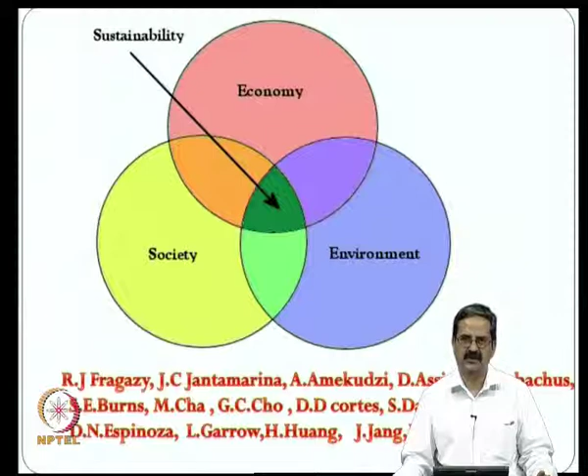What it means is that sustainability is something we need to define in this context: we need to use natural materials available today without affecting the needs of future generations, in a way that does not affect the environment, does not affect the economy, and creates general well-being. In this context, the role of geotechnical engineering is very significant.

I must say that apart from environment, it is also more about energy reuse and energy use as well. I would like to present some ideas on this today, and also understand or establish research priorities and offer suggestions to practicing engineers to get more involvement in the area of sustainability.

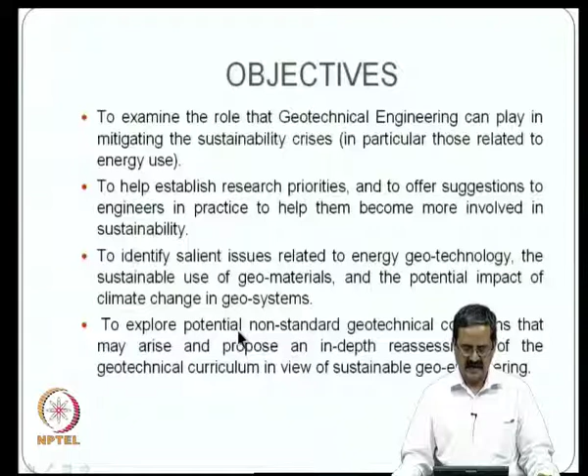We will also talk about salient issues related to energy geotechnology, the sustainable use of geomaterials, and the potential impact of climate change in geosystems. We would like to explore certain non-standard geotechnical conditions that may arise, and propose an in-depth reassessment of the geotechnical curriculum in view of sustainable geoengineering.

What we studied so far in ground improvement is that, for example, for a civil engineering structure, earlier people went for pile foundations. Of course, even now that is the order of the day, but they can be improved with, for example, stone columns. A simple example: the carbon consumption in the case of cement and steel is much higher, whereas you are trying to use some sort of stone or other aggregate materials.

In the case of soft soil, when you want to increase the bearing capacity of soil, one solution is to use columnar structures where the soft soil has, say, 10 kPa of shear strength, and you would like to improve the bearing capacity and reduce the settlements. Instead of going for pile foundations, stone columns is one viable option, or geosynthetics is another, or geocell foundations. There can be varieties of solutions, but you need to understand the impact in terms of sustainability that you are contributing.

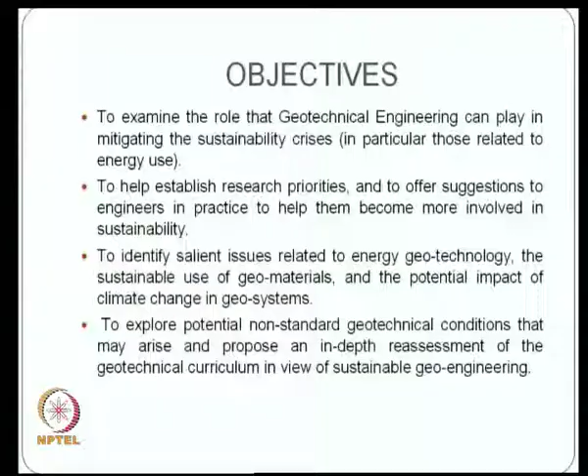We will discuss some of these things in this class today. As I just mentioned, sustainable development means you are trying to meet the needs of the present without compromising the ability of future generations to meet their needs.

The development of a sustainable world will need a very deep understanding of the global processes that are complex. There are many of them: physical, biological and human systems. Nowadays, the current scenario is that many of these factors are interrelated and they negatively impact the quality of life.

Whether in the developed world or developing world, things are happening because efforts are being made in the developed world and also in the developing world. In the developed world there is already a lot of consumption of carbon, and they are trying to understand how to go on from now on. And particularly in the developing countries, there are a lot of construction activities coming up. Is it possible to really look at what sustainability is in this context?

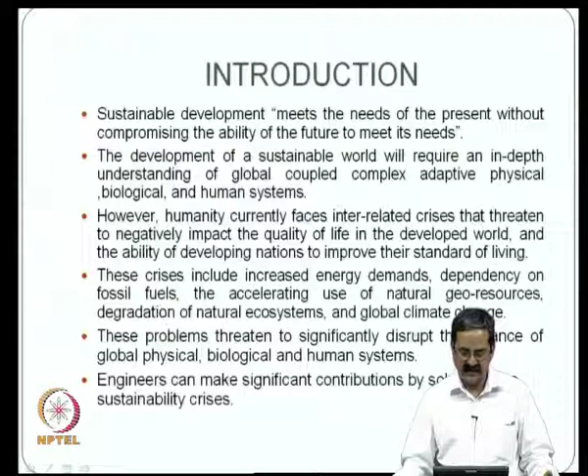So why these things have become necessary is that you have increased energy demands; energy requirements are too high nowadays, and they depend on fossil fuels. So there is an accelerated use of natural georesources, degradation of natural ecosystems and global climate change. These problems threaten to significantly disrupt the balance of the global physical, biological and human systems.

For example, there is a rise in temperature. People are aware that 20 years back it was not that bad, but now you see that there is a temperature rise, and you see that a lot of hills are being destroyed to construct roads in many areas, and definitely the ecosystem that you have in the form of hills cannot be destroyed just for certain construction in civil engineering. You need to balance our requirements and also see that they do not affect the way we live.

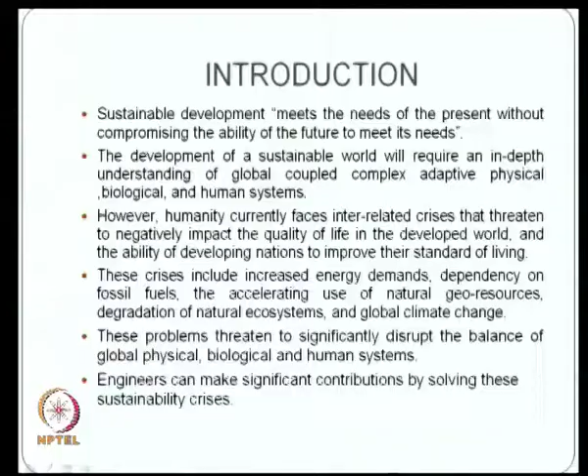So all engineers need to understand and make significant contributions by solving the sustainability crisis. It's very important. And regarding the energy crisis, you may ask how geotechnical engineering is related to energy. You will see in a minute that it has a significant role, particularly in terms of geothermal energy and other issues.

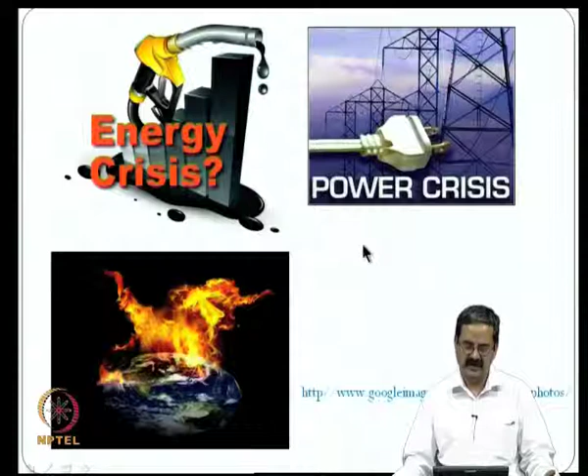What are the immediate threats to sustainability? One is the use of natural resources at a rate that will limit the ability of future generations to obtain and utilize resources such as fuels, water and air. So the rate of use of natural resources should not be so fast that it will affect the balance or the needs of future generations.

That's one thing, like material requirements. As I just mentioned, the codes normally specify good quality aggregates, but then you don't have good quality aggregates. In this context, why don't we use recycled aggregates or some materials that are stiffer and still serve the purpose of virgin aggregates? Then fuels: now we are living on a lot of petrol and other products, but is it possible to have some alternate source of fuel for heat generation? Of course, water and air are also premier important; we need all of that, and we should see that these things are not affected.

So the degradation of natural systems to a point that may jeopardize the beneficial balancing functions is something to consider. What we know is that the natural system should not be degraded, and we have to have a balanced view of what we need and what we can use. That's one thing.

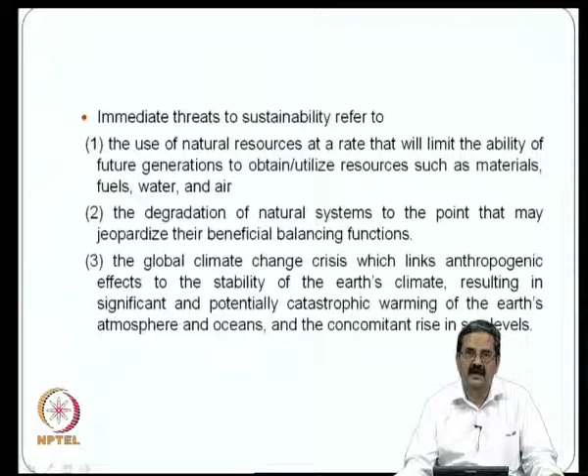And the global climate change crisis: nowadays we are all hearing that there is a temperature rise, there is an increase of carbon in the atmosphere which leads to increase in temperatures. These have links to anthropogenic effects, or man-made activities. They have a big role in the stability of the Earth's climate, resulting in significant and potentially catastrophic warming of the Earth's atmosphere and oceans and a concomitant rise in sea levels. This is a very significant point, and how geotechnical engineering can address this is something that we need to see. I'll give an example.

It's estimated that in 2007 the world consumed approximately 504 exajoules of energy. 1 exajoule is 10^18 joules, and this is equal to 12 gigatons of oil equivalent. So in 2007, 12 gigatons of oil equivalent were used, 81% of which was derived from fossil fuels. This is very alarming; this sort of reliance on fossil fuels, trying to get all the energy from fossil fuels, is not very sustainable.

This is a very serious issue, and though we may have large reserves of coal, oil, shales and possibly methane hydrates, fossil fuels are ultimately exhaustible. Everything is finite, and the possibility is that you are going to exhaust them sooner or later. For example, the world's resource of coal, about 1600 gigatons, would provide 2.5 kilowatts per person for the next 100 years, and what happens after 100 years is something you need to understand. Similarly, oil and natural gas are limited. So we need to understand that if we rely on fossil fuels as the source of our quality of life, they definitely lead to a lot of issues.

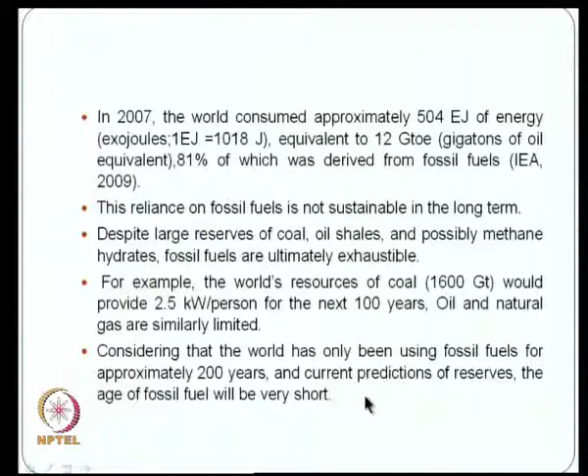This is a big change, because though this is a mean average, it means a lot for the ecosystems. For example, the melting of the snows and changes in ocean levels. There are many issues connected with this, and the climate change that we have been seeing today is a result of this.

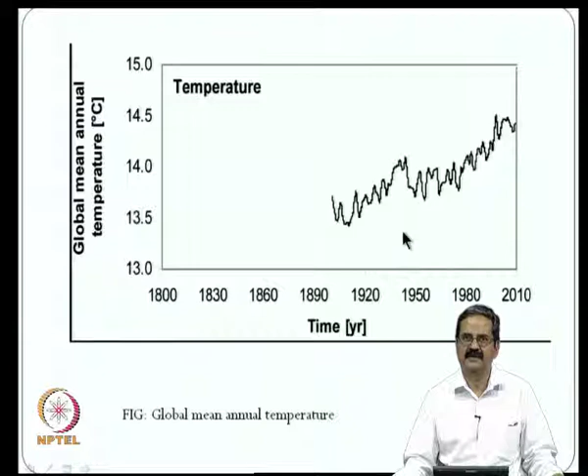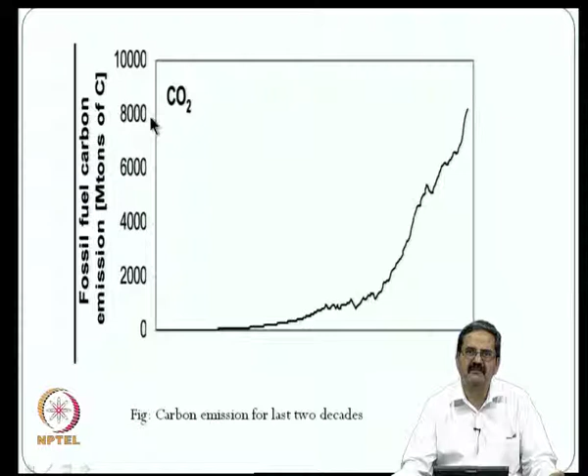And look at the carbon emissions, which are supposed to increase the temperature in the atmosphere. You can see that in recent times, in the last decades, the fossil fuel carbon emission in million tons of carbon is very high; it is about 8,000, and it is just increasing too much. So, your objective is to save this energy and also to contribute to some extent.

The relationship between fossil fuel use and global warming has been understood through increased CO2. We know that increased CO2 levels will increase the temperature, and this has been understood very well by climate modelers. The current concentration of CO2 in the atmosphere is about 380 ppm, parts per million, and research suggests that a concentration of 550 parts per million could trigger severe climate change.

This is from the IPCC 2000 report: if you have a further increase in the carbon concentration, the climate changes are going to be much more drastic. So, the objective now would be how to stick to this, and people estimate that 550 ppm will be reached by the year 2050, and unless decisive action is taken by all the communities, it is not easy to control this concentration of carbon.

Efforts to control global temperature changes to a level considered acceptable will require curbing CO2 emissions so that the concentration in the atmosphere remains below 380 to 450 ppm. There is now a specification of what is okay, and people need to work back to what a particular nation, a community, or the international community should do together so that this limit of 380 to 400 or whatever is adhered to, and we should never reach the limit of 550, because that leads to a lot of climate change.

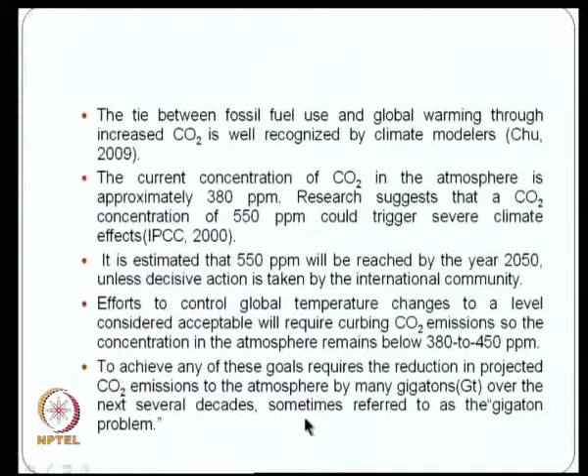So, achieving these goals requires a reduction in projected CO2 emissions to the atmosphere by many gigatons over the next several decades, and people always say that this is a gigaton problem. Most of the strategies proposed to date, such as improved gas mileage for vehicles or improved power plant efficiency, do not explicitly involve engineering, geotechnical engineering.

You must have seen that we have fuel efficient cars, but it does not mean much. For example, instead of 10 kilometers, you may have an engine which gives some 15 kilometers, but there is still consumption of gas, which is very problematic. So all disciplines, all branches of science and engineering, need to look at how to reduce this carbon print on the atmosphere, and actually geotechnical engineering is one big way.

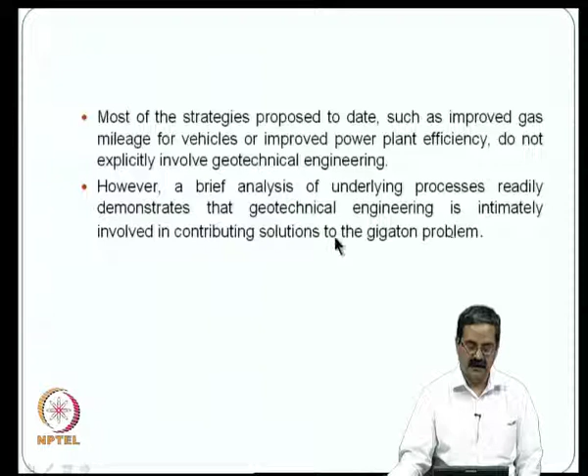If you have a proper understanding of geotechnical engineering principles and ground improvement principles, they have a very, very important role in carbon print reduction. So, I will just introduce some principles here, a brief analysis of processes in which geotechnical engineering can help reduce this issue.

This is another figure which shows that you have from 1955 to 2105 the time scale, and you have carbon emissions in gigatons per year. So, up to 2005, this is whatever has happened. But then if you continue at this rate, what happens? Definitely you are going to be on a high scale. So, the rate has been at 14 gigatons of carbon per year.

If it just goes, it is going to be significant, but then you would like to reduce them in some way. So, you have to reduce to some levels. For example, if you are aiming at a very good reduction of 70%, and there is some way, like you have different wedges drawn here, you need to identify what should be done from here. This is called stabilization wedges.

You do not want to really follow this level, but we would like to reduce by some levels, like come back, you reduce the slope of this line to this level. These are reduction wedges; you try to come out with some strategy of stabilizing or reducing. This is the point here. So, you need to come out with various methods and plans, so that the ultimate carbon emissions will not endanger the atmosphere.

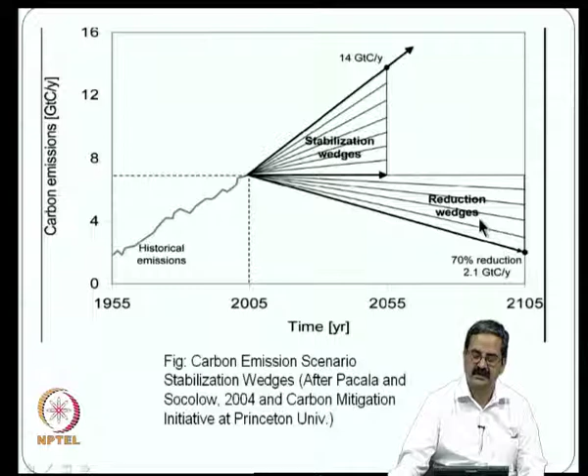People have been working on this particular point nowadays. I was in one conference in the US about 3 months back on geotechnical engineering and how geotechnical can help, apart from ground improvement, energy. It has become a topic called energy geotechnics, where you have multiple ways of handling the ground engineering problems. Nowadays, ground engineering is not just limited to ground improvement.

The concept is that you have an all-encompassing attitude that helps the globe, reduces global warming and also provides energy and energy recovery, waste recycling. Suppose there is a waste material that can be used in a road project, definitely it leads to a reduction of carbon emissions. So, people have been talking about this, and in this context, the coining of the term energy geotechnology as a part of ground improvement is something that needs to be accepted.

The main sources of energy are petroleum, about 34%, coal 26.5%, natural gas about 21%, combustible renewables and waste about 9.8%, nuclear power 5.9%, hydroelectric 2.2%, and the others mainly wind and solar. Of course, the efforts have been less in this, as per the 2007 data, and of course, it varies; different countries have different numbers in this area.

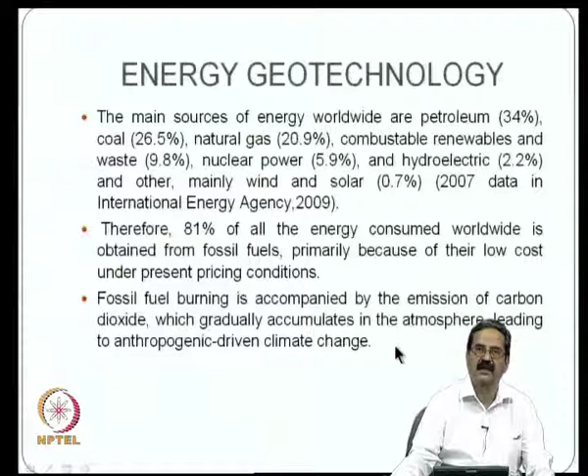This is what I would like to say. The current global energy consumption rate is about 15 terawatts, and there will be a pronounced increase in energy demand in the next 25 years because everybody is looking for economic development, and there is also population growth. If you look at these two factors, you can say there's a 17% increase if consumption and population growth continue at current rates, the business as usual option. So the 17% increase is in terms of the energy requirement. It is huge, a 17% increase is huge.

The second thing is a 66% increase if consumption in the underdeveloped countries increases to levels required to attain a proper quality of life. We know the quality of life in some countries is not good, and the way quality of life is defined needs to be examined in the context of what consequences it has. A 66% increase is big, and suppose an underdeveloped country does not have fuels and relies on fossil fuels, burning their existing options, then it leads to very significant effects, a big bearing on energy demands as well as climate change.

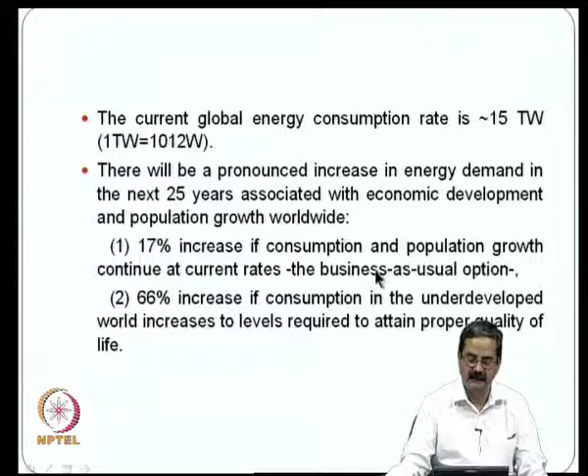So what people have been trying to do is look at geothermal energy as a source of energy. For example, deep geothermal energy systems extract heat from hot rock formations. You have hot rock formations underground where the temperature is about 350 degrees, to produce steam that can be used directly to provide heating or to generate electricity. Many countries have been doing experiments in this direction.

Conventional geothermal technology focuses on energy production from rare near-surface hot spots that are sources of steam or hot water. For example, in the Himalayas and other places, people are aware of hot springs that exist, and people are looking into whether this information can be used to obtain geothermal energy. If you have a hot spot in the Himalayas with no electricity, that could be a good option to irrigate or provide electricity to nearby villages without too much effect on other lives or issues. The vast majority of the world's accessible geothermal energy is found in hot dry rock, and the reservoir must be engineered for energy production.

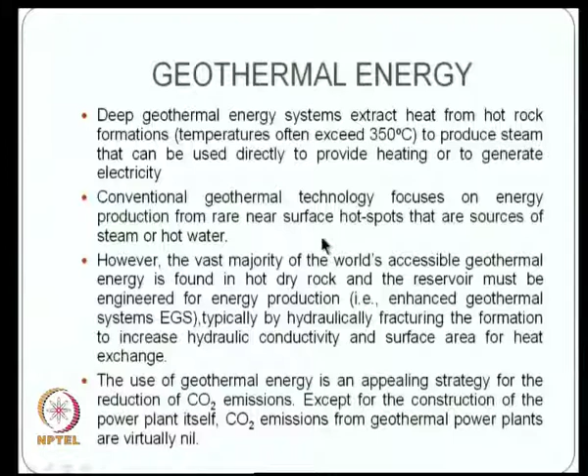This is a typical figure. At deep temperatures, you have injection wells, then production wells where you can recover that energy. You have deep geothermal recovery for electricity generation, and there are also ways of distributed geothermal storage and recovery systems at shallow depth for residential purposes.

There are certain issues where for houses, particularly in places like the Himalayas or even in the UK, where the climate is very cold in winter, people use room heating, which is a big source of energy consumption. People have been looking at options to obtain geothermal energy from the ground and use it for room heating. This is for houses and apartments.

In fact, people have what is called energy piles. I am aware of the work being done in the UK, particularly at the University of Cardiff, where they think energy piles could be one option to reduce the load because of room heating requirements.

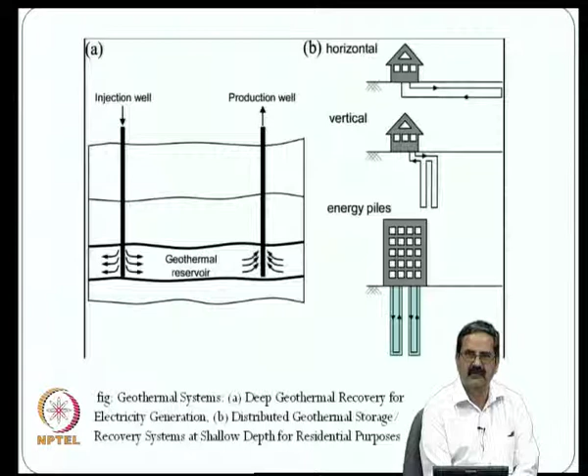So these are some examples. Very importantly, whatever you do, you are looking at sustainable geothermal systems, meaning they should be useful as a source of renewable energy, number one, and it cannot be an energy that gets exhausted. So you must have a time scale for these systems, for example, how can you make geothermal systems very effective over 10 years?

One serious issue I always feel, apart from geothermal energy and solar systems, is that world energy systems have certain impacts. In India it's common practice that in many villages you don't have power in summer, and in summer you have sun burning at 45 degrees temperature. If you have some sort of heat recovery systems, energy recovery systems, and proper piling and foundation systems where energy can be stored at the top and bottom, there could be a system where, based on certain calculations, over some years you establish that you do not need energy from conventional sources, and the energy from geothermal or solar systems is sufficient. That would be a big contribution.

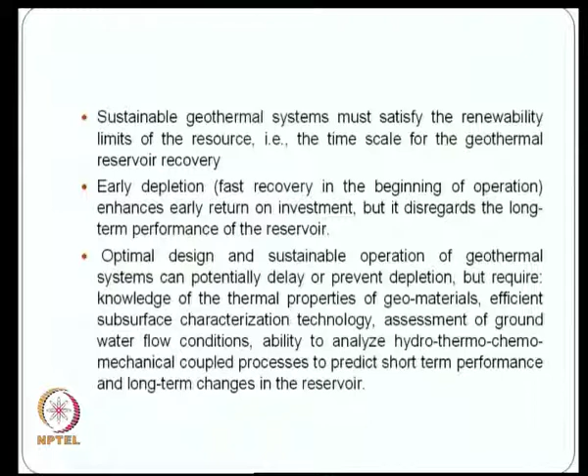One should be careful, because fast recovery in the beginning of the operation enhances early return on investment, but disregards the long term performance of the reservoir. So you should strike a balance between the depletion and, for example, you would like to store all the energy in terms of watts to a particular area, but you should be able to judiciously combine the needs as well as the capacity.

These are all very, very intricate issues. The capacity that one can have in a particular system, and also the demand that you can place on the system, is something that one needs to assess properly. People have not completely understood some of these systems. And these are all the areas that are governing the future.

So one should look at, and all geotechnical engineers or ground improvement engineers should look at devices. Say if somebody is going for piles as a source of energy, like thermal piles. One needs to understand, instead of the use of stone columns to improve bearing capacity, the use of a steel pile or some sort of thermal pile to recover heat and bring it to the ground, is something very innovative. So one needs to understand a lot of dynamics.

For example, people need knowledge of the thermal properties of geomaterials, like hydraulic and heat conductivity of the materials, efficient characterization of the subsurface materials, and assessment of groundwater flow conditions, since water has a significant role in temperature reduction and increase. More than that, the ability to analyze the hydro, thermo, chemical and mechanical processes—you have a number of processes here: water related effects, thermal effects, and also chemical effects and mechanical effects.

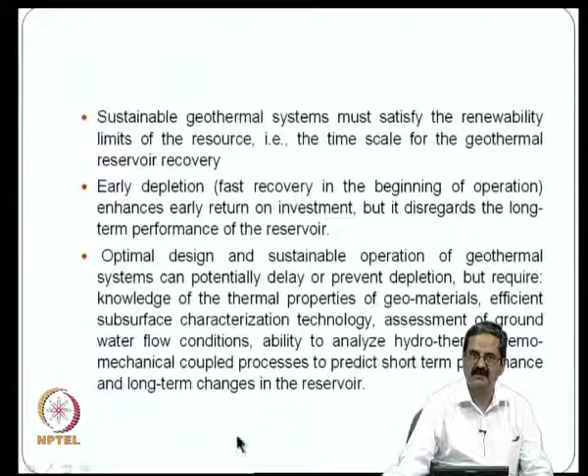So development of enhanced geothermal systems also requires advances in drilling technology. The conventional technologies are not adequate. You may have to go for high temperature rock drilling for deep systems, controlled hydraulic fracturing in hot rock, and analysis of induced seismicity.

In fact, you need to do hydraulic fracturing, breaking of the rocks in a controlled manner, and you must see that the more you introduce fractures, the more it leads to some sort of seismicity—like plate tectonics should not be affected. We had the classical case of reservoir induced seismicity, which should not happen here. So one needs to understand that there should be a controlled way of doing this particular thing.

So without advances in these areas, geothermal power production will be significantly limited. You may have a lot of knowledge and ideas, but if you do not exploit it in a proper way, it may lead to much more serious difficulties than what you initially thought of, and one needs a lot of careful analysis.

The other concept I mentioned was shallow geothermal heat pumps used in homes and commercial buildings. They utilize the thermal capacitance of the ground to transfer heat from the structure to the ground in the summer, and from the ground to the structure in the winter.

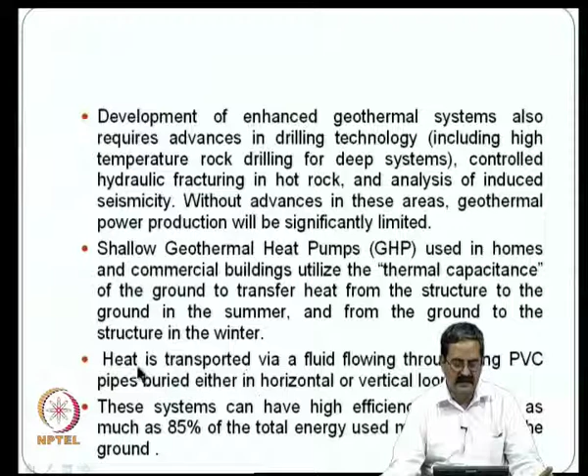And even in foundations, the way that we design them. In most cases, the heat is transported via a fluid flowing through long PVC pipes buried either in horizontal or vertical loops.

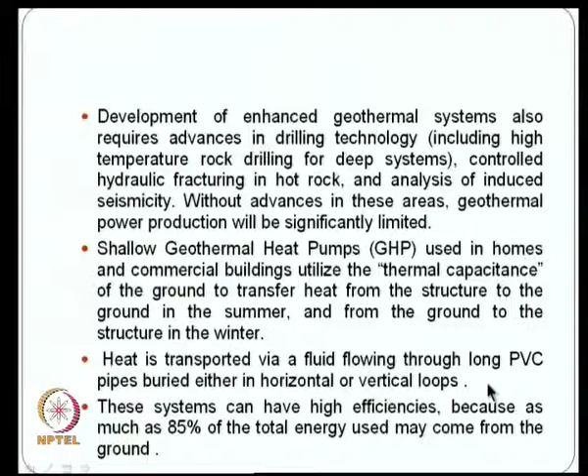These systems have very high efficiencies, because as much as 85% of the total energy used may come from the ground. Some people have made calculations on this, and they say these are highly energy efficient systems, and people have been using it.

Geothermal heat pumps often require more than 100-meter deep boreholes, or trenching 1 to 5 meters deep for single family home systems, or can incorporate the loops within the deep foundations for high-rise buildings, as energy piles. This concept of energy piles is what has been followed in the UK and other places.

This was in fact highlighted in one of the earlier lectures, when I discussed the scope for ground improvement. You can see that it needs very deep boreholes, also trenching at a deep level, which is not easy.

The cost of the boreholes needs to be understood—it's quite expensive as well. And then even having loops within the deep foundations, particularly if you are trying to go for pile foundations, you need a system of piles—the energy piles.

The use of these systems for residential heating, ventilation and air conditioning is growing rapidly in Europe, and energy piles are becoming more common in commercial structures. People have to maintain an apartment, and if the energy requirements are going to be too high, it's not easy.

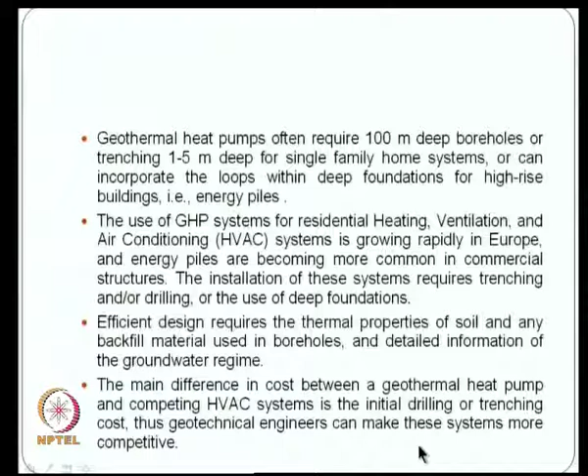Energy piles have the additional constraint of being utilized for support. This is where the concept of geotechnical engineering comes into picture—cyclic heating and cooling affects the skin resistance of the piles. Steel pipes are being used, and when you have cooling and heating of the piles, that will affect the skin resistance and may cause some settlements.

The long term efficiency of the GHP pipes or systems, including energy piles, is significantly influenced by the balance between the cooling and heating loads.

What are the cooling and heating loads? The piles or foundations, now acting as energy recovery or energy storage systems, are subjected to cycles of cooling and heating. We need to understand how the efficiency of these materials is influenced by cooling and heating, and understand the loads one can expect, as well as how ground temperatures play a role in this.

In addition to reducing the efficiency, sometimes what happens is that if the loads are not balanced, the ground temperatures gradually increase. What is required in this case is that we need to understand the loads, like cooling and heating.

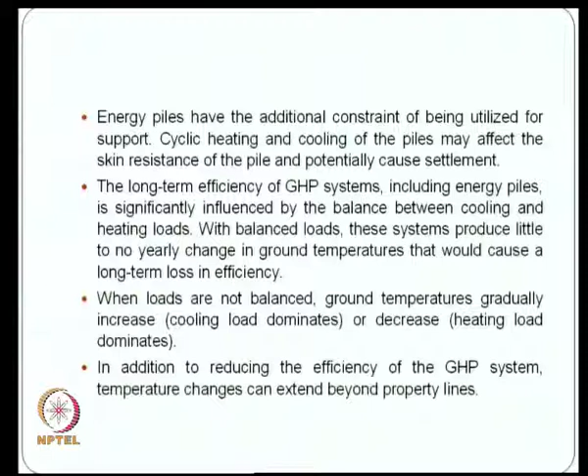What it means is that in a particular winter and summer, in the case of winter you need heat, so there is a lot of load, but in the summer you're trying to recover that capacity. So you have to see the balance in such a way that your design of the system should not lead to inefficient design.

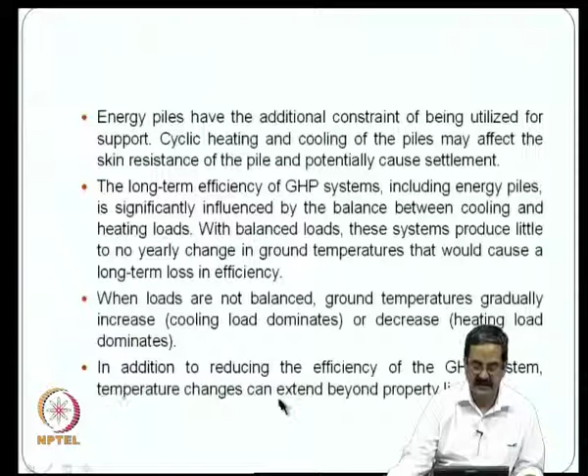When the loads are not balanced, the ground temperatures gradually increase and decrease and dominate, in addition to reducing the efficiency of the heat pump system. The temperature changes can extend beyond property lines. One should be careful about it.

The reason I am mentioning this is that people have been working on these lines, and of course we in India at least are not aware of the impact that it has. Definitely, use of these systems in highly congested areas like in Europe, where the urban localities are more populated, has significant issues, because the ground temperature changes from one system could affect the neighboring systems.

Similar to when you try to excavate a building here and remove some soil, it definitely affects the stability of the next building. So whatever changes you make here in the energy systems should not affect the next one, and this is very serious.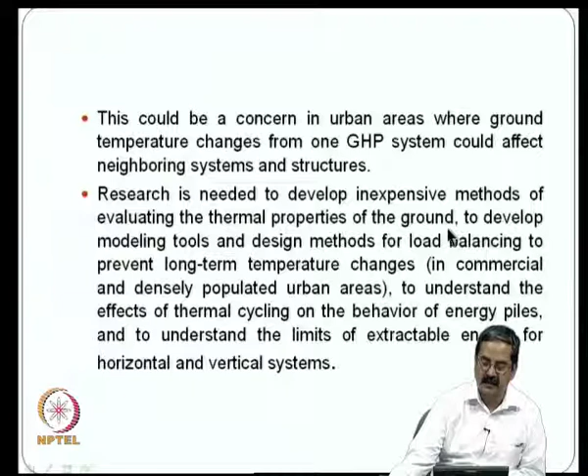So there is a lot of balancing that needs to be done, and research is required to develop inexpensive methods of evaluating the thermal properties of the ground. In fact, we do not have very good in situ methods. We should go for in situ methods of heat conductivity of the soil, and also develop modeling tools and design methods for load balancing to prevent

long-term temperature changes. You need to even use signal based processing techniques to see that if there is so much temperature rise, there should be an automatic switch off and switch on system, where your objective is essentially to get a balance.

You can only take what you need, so that sort of balance should come, or store what you can store. Excess heat also leads to problems, and deficiency also leads to some problems. So these variations need to be catered for in the design of the heat recovery systems.

The other thing I mentioned, the effects of thermal cycling, is something that needs to be understood, and all these things have to be examined in a careful manner.

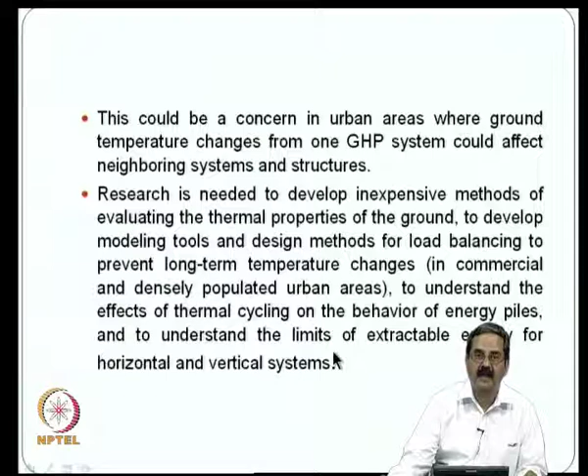Uses of underground space for energy storage is something that people have understood very well in recent times, particularly in the area of rock mechanics and geological engineering, where people have been doing a lot of work. Maybe in the broad spectrum of geotechnology it is not attempted, but if you have a bigger, global picture, people are looking at geoengineering or ground engineering in a way that energy can be stored.

One important reason is that solar, tidal and wind energy are inherently intermittent, and they have a lot of fluctuations in electricity production. So what people are trying to have is a lot of energy storage systems in the ground to efficiently use the generated renewable power.

So you have a lot of energy recovery systems, and you need to really store them properly. Geomechanical systems such as pumped storage, hydroelectricity and compressed air offer the means of storing large amounts of off-peak energy to supply peak demand. What people have been trying to say is that you store all the energy - hydroelectricity is one way, like we always have been doing, and compressed air.

In fact, you have to store this compressed air as a means of energy - compressed air has a lot of air pressure, the pressure energy. So that can be used as a storehouse, so that all the energy that you have can be stored to supply when there is a peak demand.

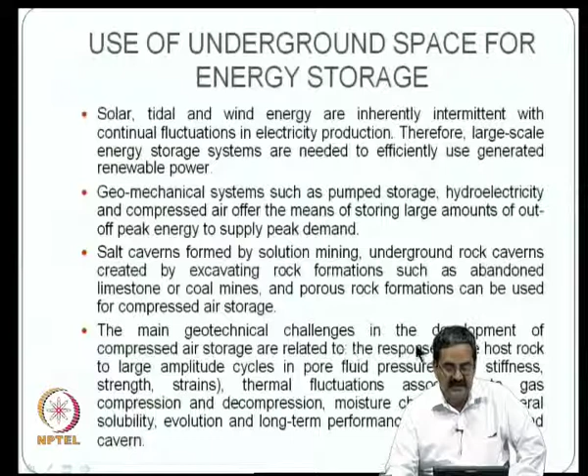So, the main geotechnical challenges in the development of compressed air storage are there. For example, the response of the host rock to large amplitude cycles in pore fluid pressure, stiffness, strength and strains. Actually, what is happening: compressed air has a lot of pressure inside, and if you store it in a particular material, it exerts a lot of pressure on it. So, the stiffness, strength and strains that are induced because of the compressed air pressure need to be understood in a proper manner. Then thermal fluctuations associated with gas compression and decompression, moisture changes and mineral solubility.

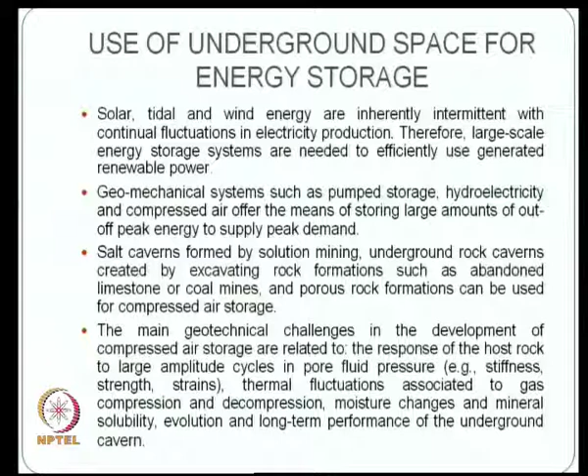I mean, even some of the rock materials are soluble. So, one needs to understand the evolution; long term performance in the underground caverns is very, very important. One should understand that this is another issue of ground engineering; though the title of the course is ground improvement, this is ground engineering, or what is called geoengineering.

So, this is an example of what the response time is for different energy storage. Say for example, energy in kilowatt hours and the response time, and you can see the power and then the energy, and batteries have very quick response systems because their response time is faster. Then you also have fuel cells, they are somewhat here, and pumped hydro storage is somewhere here, and compressed air energy storage is here. What I meant was that they may have low response time.

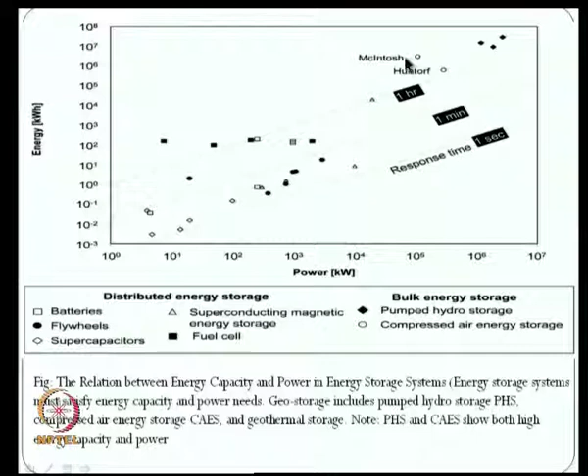So, definitely this is some sort of understanding, actually similar to stand up time in soils, like sands have less stand up time and clays have more stand up time when you do an excavation. So, these are all some sort of work people have done to understand what is going to happen, how the response time is. So, this is also quite important in the case of different energy systems.

Another important point is that people have been looking at radioactive solid waste, and you need to contain that in a proper way, and nuclear power generation embodies very low CO2. The advantage of nuclear is that it has low carbon emissions, and the use of nuclear reactors will demand the development of long term radioactive waste repositories. People have been working on this, and though nuclear energy is thought of as a serious alternative, there is a setback because of the incidents of the earthquake and tsunami in Japan, but I think people are still trying to pursue that, and it's very critical engineering, and definitely geotechnical has a big role to play in trying to address the issues of nuclear energy at all stages.

Say for example, mining of the radioactive material, how do you handle that? Foundations of nuclear power plants, static and seismic design, heat absorption for new generation systems, spent fuel pools, how do you handle the spent fuel, and geophysical monitoring and leak detection, bioremediation, waste repositories. There are many issues, and a series of natural and engineered barriers to contain waste that will be carefully prepared, packaged and placed in excavated tunnels is something people have been looking at, but the stability of the engineered barriers needs to be assessed through a number of experimental studies, detailed studies and simulations.

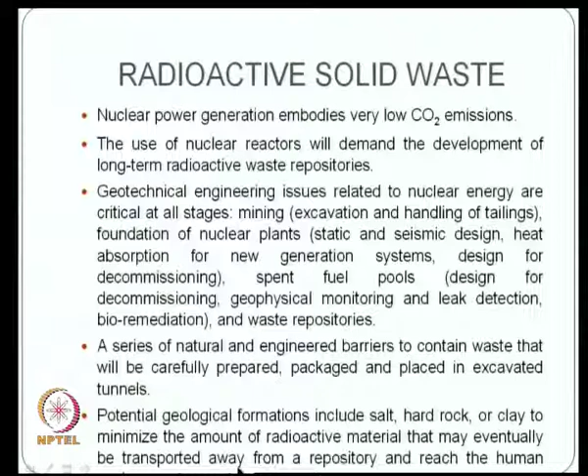People in Bhabha Atomic Research Centre and the Department of Atomic Energy handle this, and of course the role of geoengineering or ground improvement or geotechnical engineering is quite significant in all these issues. And potential geological formations include salt, hard rock or clay to minimize the amount of radioactive material that may eventually be transported away from a repository and reach the human environment.

So, many of these environments need to be seen properly, and as I just mentioned, significant reduction in carbon emissions could be realized by implementing carbon capture and storage methods. The objective is that when there are carbon emissions, we try to capture them, so that they do not really heat the atmosphere. That is another way people are working on this.

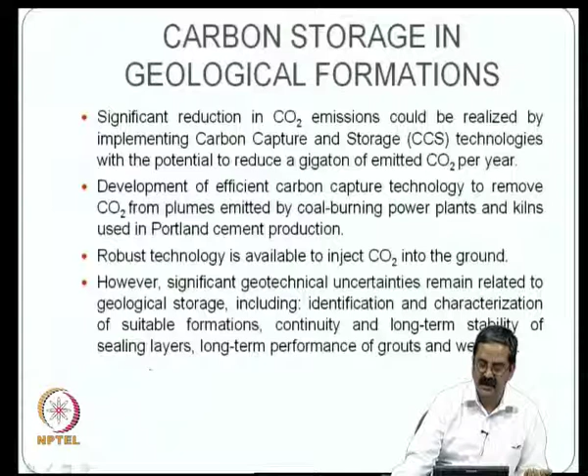Development of efficient carbon capture technologies to remove CO2 from plumes emitted from coal burning plants and kilns used in Portland cement production is something that people have been looking at. Robust technology is available to inject CO2 into the ground. However, significant geotechnical uncertainties remain related to geological storage, including identification and characterization of suitable formations, continuity and long-term stability of the sealing layers, and long-term performance of grouts and well plugs. There are so many issues that people have been trying to address.

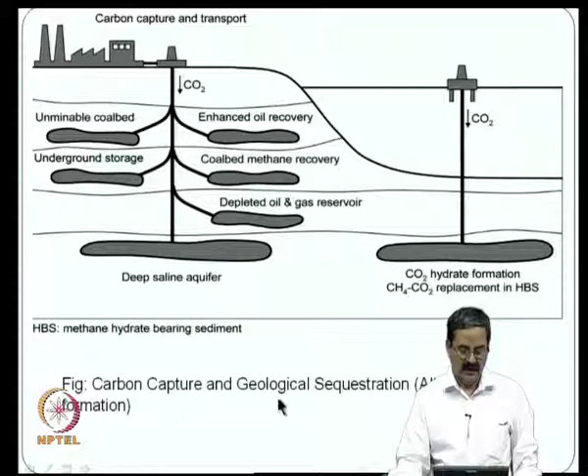So, for example, capturing the carbon from a particular plant, how do you do that? This is one schematic way. This is another schematic way of trying to capture the carbon at various levels, and this is what we call carbon capture and geological sequestration.

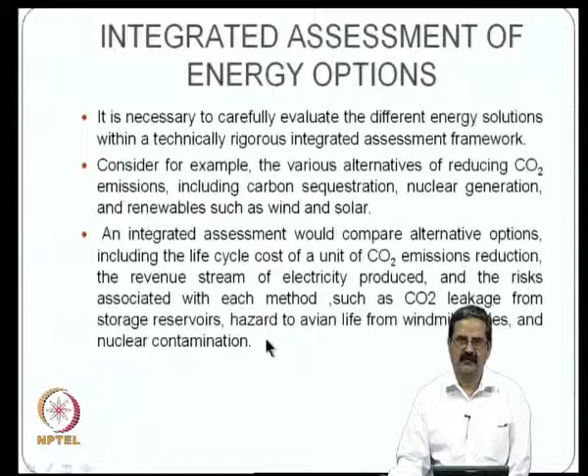So, people need to understand the energy options in a different way, and also see that there are integrated reviews of various ways of reducing carbon emissions, such as carbon sequestration, nuclear generation and renewable sources. So, you should have an integrated view of the carbon emissions as well as the leaks. It is a serious issue. One should understand them in a proper way. Otherwise, as the saying goes, the right hand doesn't know what the left hand is doing. That should not really happen in the case of energy.

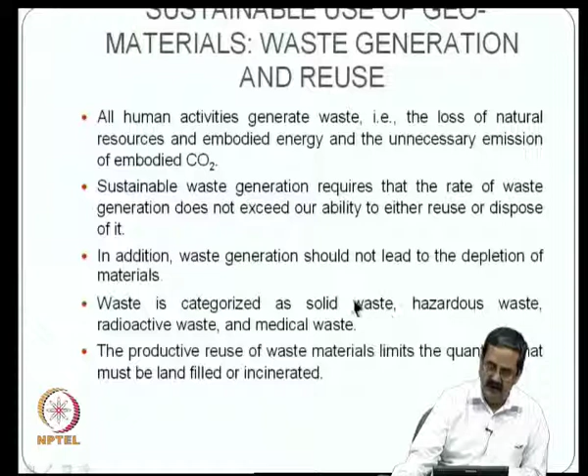And people have been looking at sustainable use of geomaterials, like the use of waste, solid waste. Maybe I will address that in another lecture, where sustainable waste generation requires that the rate of waste generation does not exceed our ability to either reuse or dispose of it, particularly, for example, in the case of landfills or hazardous waste materials. So, you need to contain the waste and reuse the waste in a proper way.

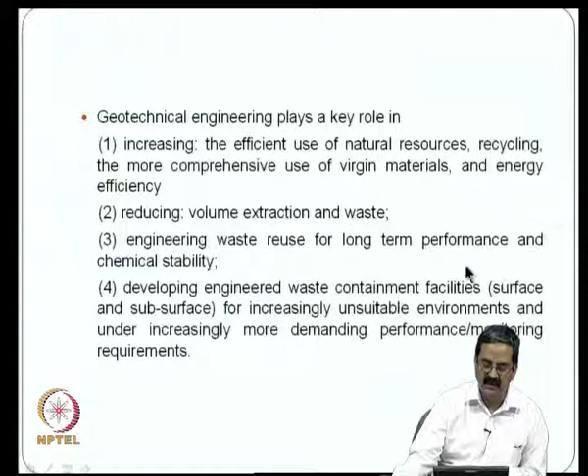So, that way geotechnics plays a big role in the efficient use of natural resources, recycling, more comprehensive use of virgin materials and energy efficiency. It reduces the volume of waste, engineered waste reuse and long-term performance, developing engineered waste containment systems, which is very, very important. And there are a lot of challenges, and definitely to prevent the effects of climate change, geotechnics is quite helpful. The effects on geosystems are a serious issue.

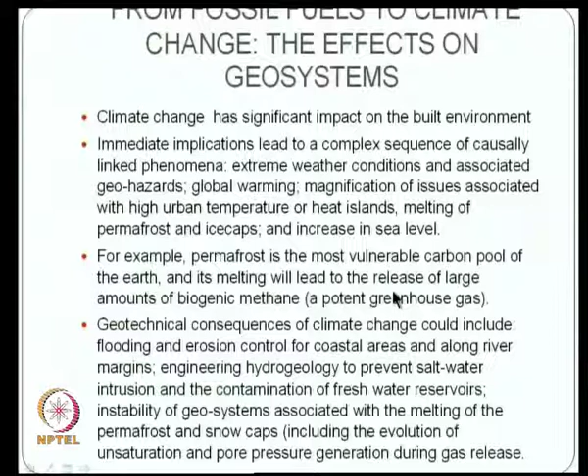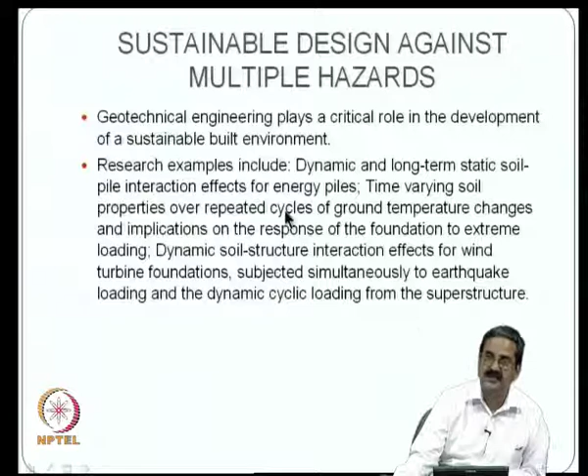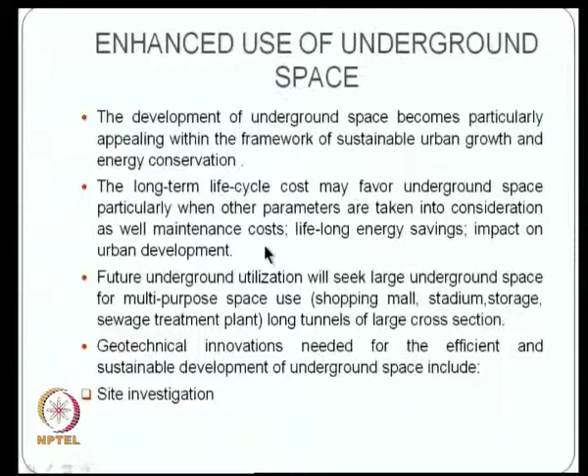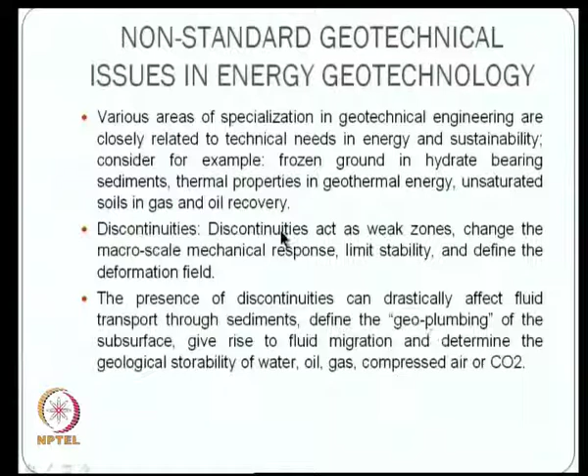So, some of these issues need to be addressed in a simple way, and enhanced use of underground space is another important issue. So, proper geotechnical engineering, life cycle cost analysis, underground utilization, and site investigation should be there. There should also be self-adaptive tools, excavated materials and good support systems. Whatever is considered standard may not be applicable here, so you need innovative ways of doing things. One should look at many innovative methods for geotechnical issues in energy geotechnology.

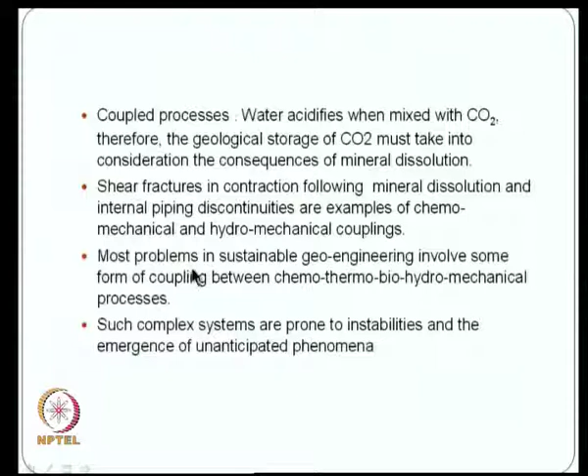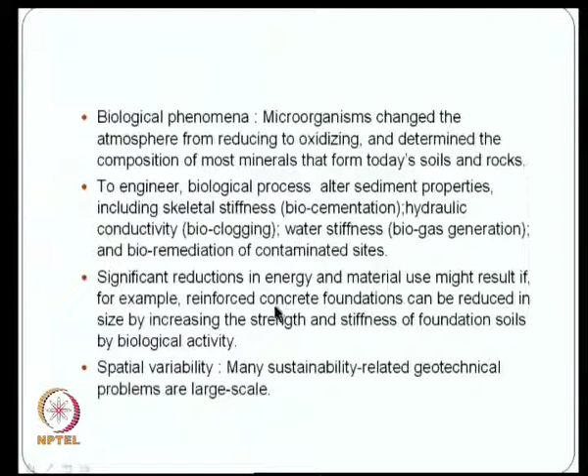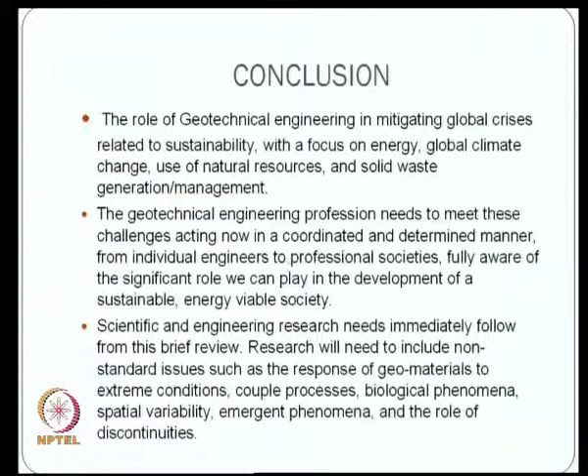For example, coupled processes, shear fractures, and most problems in sustainable geotechnical engineering are very complex. There are also biological phenomena, and spatial variability of many geological and geotechnical properties, which is very significant. So, what I would like to say is that geotechnical engineering has a significant role in controlling this, and people have to significantly include it in the geotechnical curriculum.